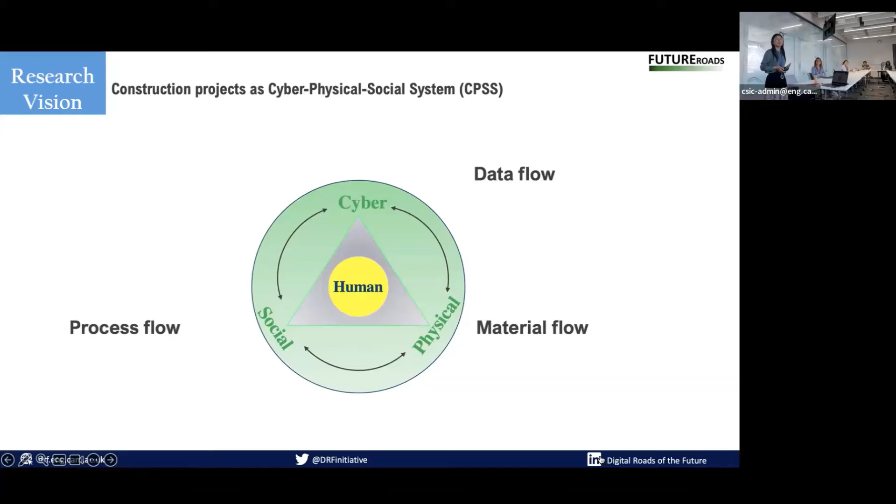I always try to answer the research question of how to adapt the data, process and material flows in CPSS construction projects to modern construction methods and digital transformations. Because the construction industry is quite a traditional industry, which is very reluctant to change. It has its own data, process and material flows, and modern construction methods and digital transformation have introduced new flows, which we have not very well fused or integrated. So that makes things more complex, and it causes a lot of chaos, as I can see.

So I try to look at this problem in my whole research, and I have looked at the data flow by integrating IoT, BIM, and blockchain, using this digital technology to bridge the data flow between the cyber, physical, and social subsystems, and to achieve data-driven decision-making and cognitive intelligence by streamlining the data flows among the different subsystems.

And also, I looked at the process flow of construction digital transformation, how digital technologies shift the process flow of construction project organizations. And I looked a little bit at the material flow by looking at the waste materials, and now at carbon, because carbon is also associated with the material flow. So that's what my whole research landscape looks like.

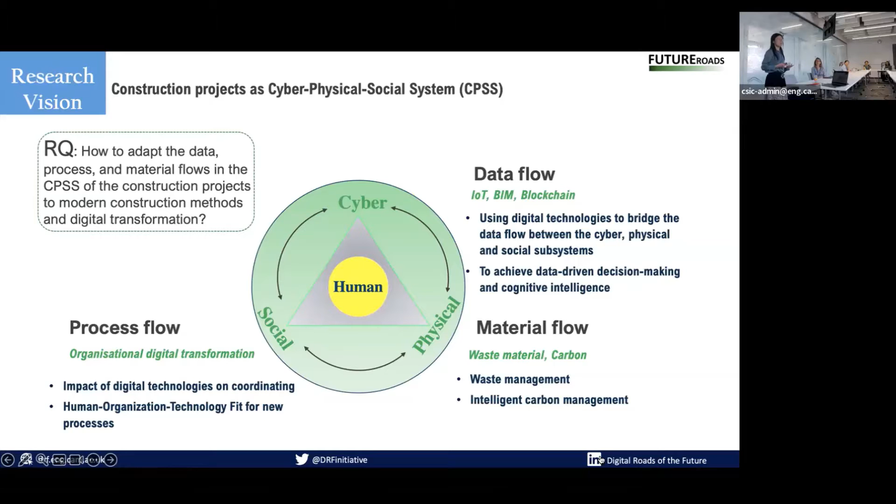And I think humans play a significant role in this system. How do we adopt technologies while considering humans' requirements and learning curves, and how to ease the work and make the system more friendly and digitalized or automated for the ease of humans, to assist humans, to augment humans. That's something I would like to achieve in my future research.

So enough about me. This is the outline of my talk today. I'm aware that maybe the audience is not all in carbon-related areas or highways, so I will start from a general introduction of the infrastructure sector, its impact on net zero and the carbon management standards at a higher level, and then dive a little bit into the highway industry, the practice that I learned from the engagement with National Highways and its network, and identify the gaps and the need for trust.

Then I'll present the concept we proposed called carbon data trustworthiness, what the conceptual framework or model looks like, and what we try to achieve later. And the research and industry engagement plan will conclude this talk.

So I think everybody knows that there's an urgent schedule for us to achieve net zero by 2050, and by 2030, that's the middle of it, we have a very huge emission gap. We need to reduce 12 to 33 gigatons of CO2 equivalent, which means we need to use 100 to 200 gigatons less of reinforced concrete.

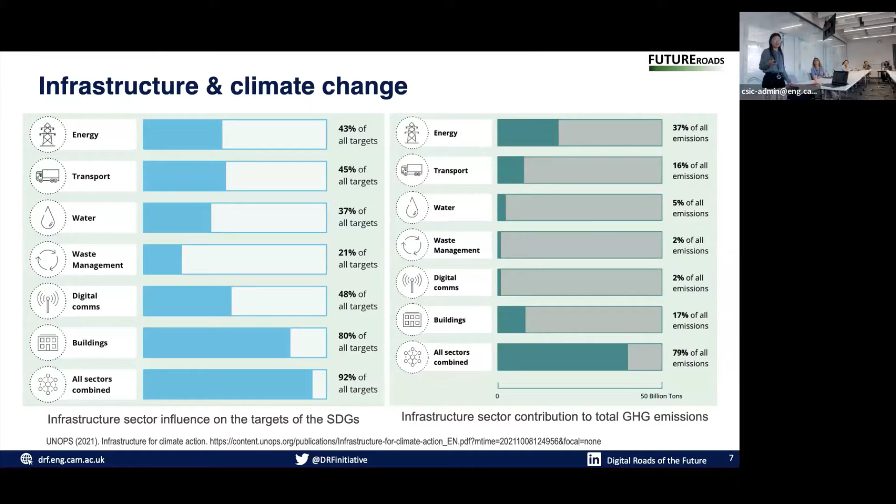Infrastructure plays a significant role in climate change and influences the sustainable development goals. You can see that all these infrastructure sectors combined influence 92% of all the targets of the SDGs, and infrastructure contributes 79% of total GHG emissions, which is a lot. So we need to act now, and join our forces.

There are lots of carbon management standards and guidelines being developed. The most widely used one is the Greenhouse Gas Protocol. They have a set of protocols for countries, cities and communities, as well as companies and organizations. These are all more overall, high-level greenhouse gas, CO2 management standards.

We also have a lot of international standards listed here, and also national standards like the BS ones, PAS 2050 or the 2018 ones. These standards are more focused on life cycle assessment, LCA, and environmental product declarations, EPD. They are about principles, frameworks, requirements and guidelines, and some are methodologies for the overall environmental or sustainability assessment of general products or construction works.

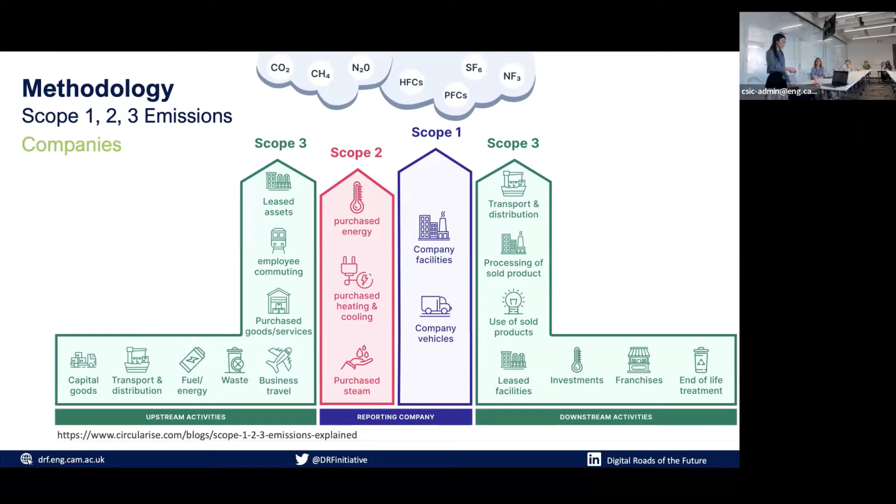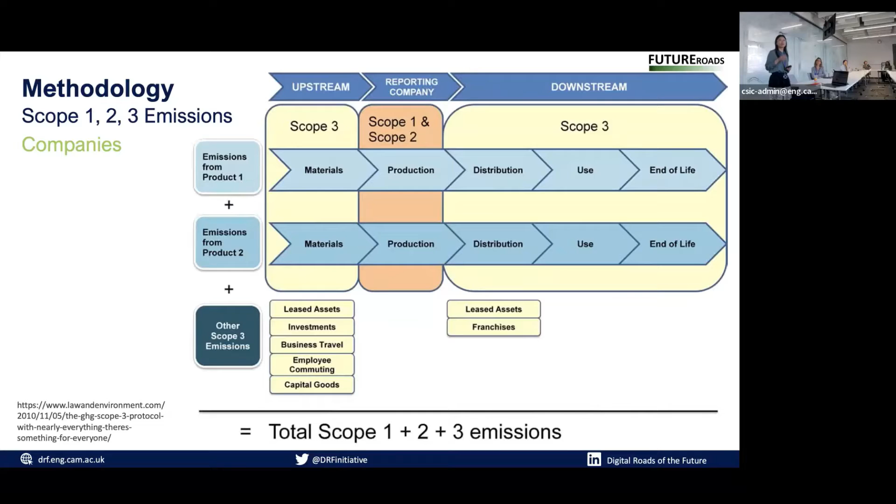And this is another way to look at the 3 scopes. If a company has different products, you can see how the 3 different scopes stem from the life cycle of their products, and adding them up, we have the total emission of one company. There's also another methodology for accounting carbon, which is the life cycle carbon modules of projects and assets. This is more focused on projects and assets. It categorizes carbon into embodied carbon, operational carbon, and user carbon.

These modules are adapted from the BS EN standards and PAS 2080, which I will articulate later. This also links to the EPD, which sometimes calculates just cradle to gate or cradle to grave. A1 is raw material supply, A2 transportation and A3 manufacturing; that's cradle to gate, which means from raw material to products.

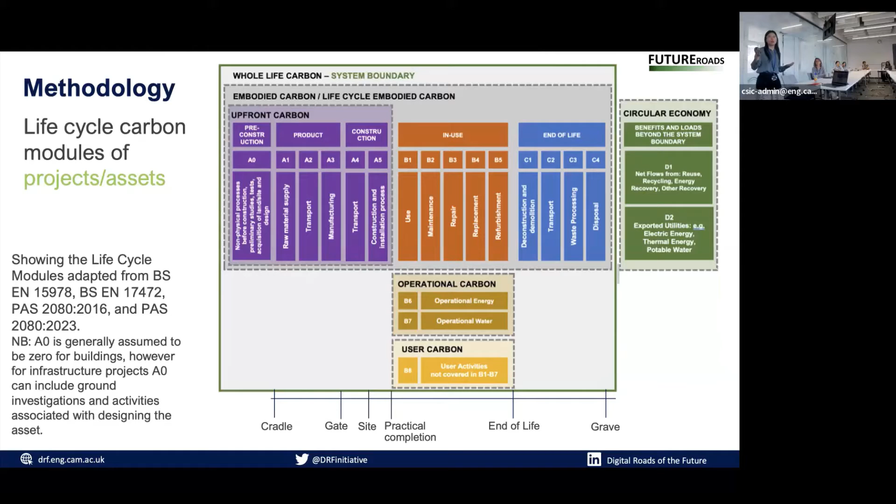For construction industries, that's to the gate of the construction site, and then we have construction activities, the practical completion on site. Then we have the in-use stage, and when it ends, we have the end of life calculation, when everything is disposed, and we enter the grave stage. And another methodology is product carbon footprinting.

So this is more focused on the product, the 7 stages of a product's life cycle, from its exploration to the end of life. And this also can be connected to the different scopes of the GHG protocol. And also here, I want to remind you to think about linking the 3 different methodologies, like the 3 different scopes, that's for companies, and then the life cycle modules, the A1 to A5, B1 to B8, C1 to C4 of the life cycle of projects, and also these product ones.

I think these are the different lenses to look at carbon emission and accounting, like different scopes, but they can sometimes be related in a lot of ways. Like in our construction industry, a project is to deliver a product, like a highway or building, that's a product. And organizations are sometimes project-based organizations. So there are interfaces between these different ways or different lenses to look at this. And I think we need to be more clear about and streamline the interfaces among these different methodologies.

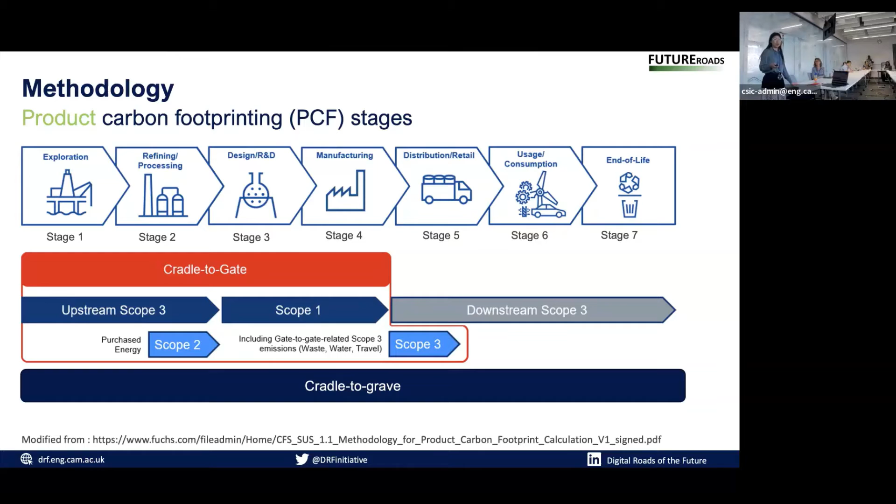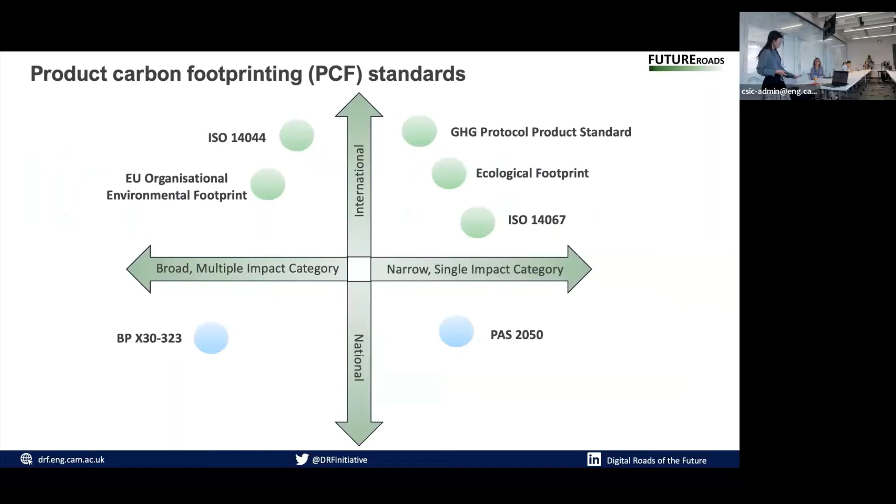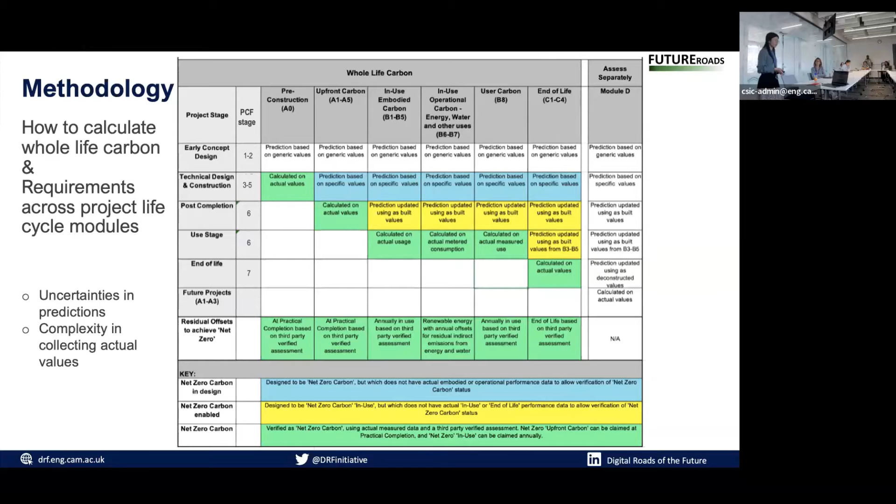What I want to emphasize here is that there is a lot of complexity in collecting the actual values. So on the one hand, there are a lot of uncertainties in the predictions, and on the other hand, there's a lot of technical and managerial complexity in collecting the actual values. So ideally, we can calculate the whole life cycle carbon using all those different methodologies, but in reality, it's very hard to get reliable data to support our decision making. And what I've introduced before, all the standards are more general.

And now I'm going to narrow down to the standard for carbon management in infrastructure. You must have heard about PAS 2080, which is widely used in the UK industry. We have an updated version of this this year, so it includes buildings already. And this one, the guidance document for PAS 2080, if you are looking into the carbon management area, I think is more detailed or specific about how to do it. And these are just some key terms to help you understand the differences we're talking about.

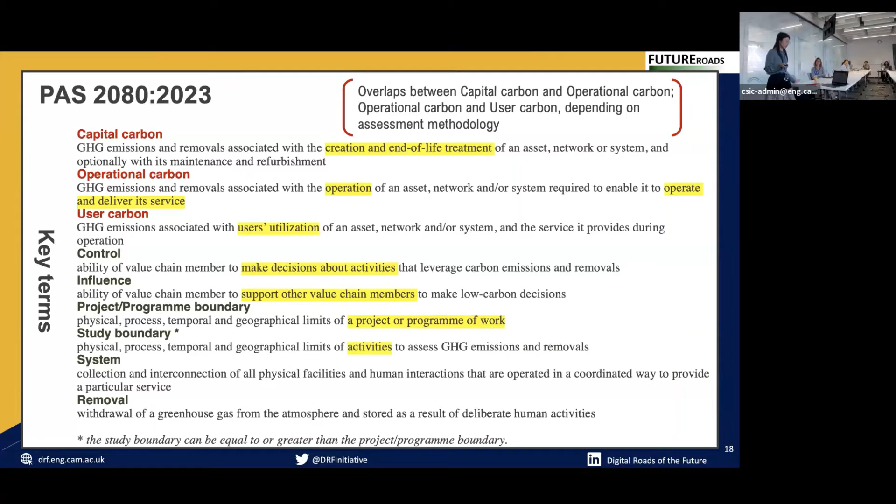Capital carbon, which is also sometimes called embodied carbon, means the creation and end-of-life treatment of an asset. Operational carbon is the operation of an asset, and user carbon is the users' utilization carbon. But we can see that in capital carbon, sometimes we also calculate maintenance, refurbishment and operation, to enable the operation and delivery of services for utilization. So there are some overlaps between these three categories of carbon in infrastructure. Where the scope lies depends on the methodology you're using, and some other terms are not very significant to this talk, but if you look into carbon calculation, you should be aware of those.

And so the new PAS 2080 is expanded in scope to include not just infrastructure, but also buildings. It's focused on behaviors and good practice principles intended for the whole industry. And it looks not just at assets, but also systems, networks, and sometimes the whole system of systems. It emphasizes the importance of leadership, governance, and collaboration across the value chain and beyond, and also includes guidance for government, regulators and financial risk. It encourages a consistent approach across the built environment industry, but it does not provide this consistent methodology; it just encourages companies and organizations to create this. And it emphasizes that we should not conflict with other existing standards, schemes and notices.

So I want to highlight these consistent approaches, because the standard developers may also realize that there are currently no consistent approaches. That's what we're trying to do here. And more about what it is not about. It's more about the process of carbon management across the value chain network, but it's not about prescribed quantification or assessment methodologies and data gathering. A lot of companies are referring to this, but they cannot find the quantification or assessment methodologies here, because they said this is already addressed in other standards and specifications, referring to some of the standards I summarized before, including ISO 14044 and the other ones.

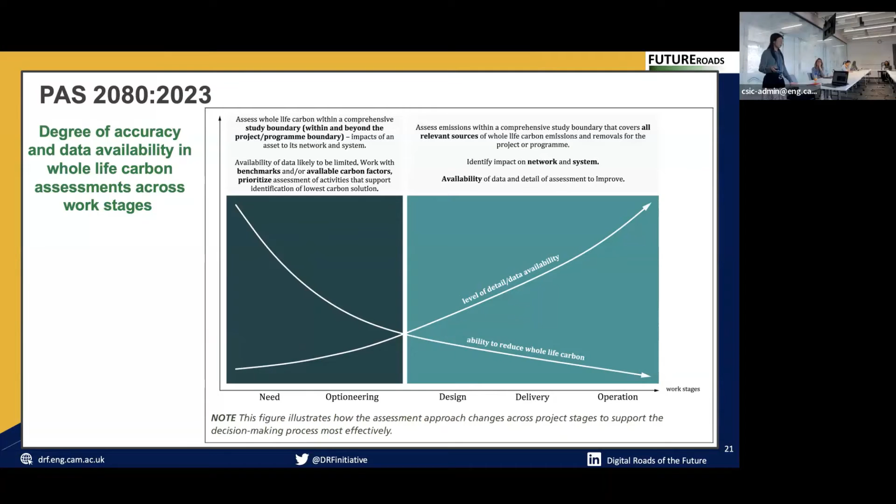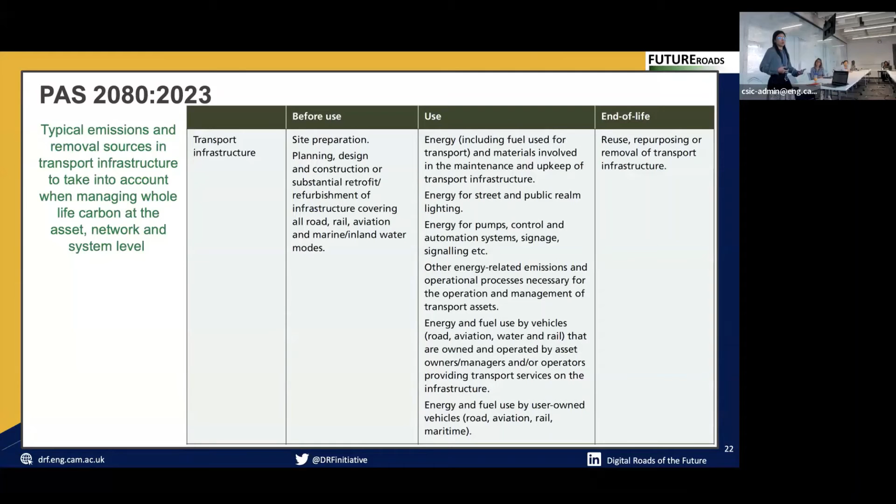And these are some of the typical emissions that were listed in PAS 2080 related to transport infrastructure. So what you can see is just some points, which are very broad and general. So I didn't see that stakeholders can refer to this to streamline the carbon calculation methodologies, or what they should do or not.

So now, since my project is focused on the highway industry, I will introduce more about this. National Highways have their net zero plan. They would like to achieve zero corporate emissions by 2030, net zero by 2040 in maintenance and construction, and the road user emission net zero goal by 2050. And these are the kind of activities they are doing to push through this.

It's just for background. They also have some different strategies and plans, like this carbon construction innovation program, which aims to identify and define the challenges and opportunities for innovations. And the carbon management system, which I've heard them talking about and is still in development. I think it's an overall management framework or system they want to oversee the carbon management.

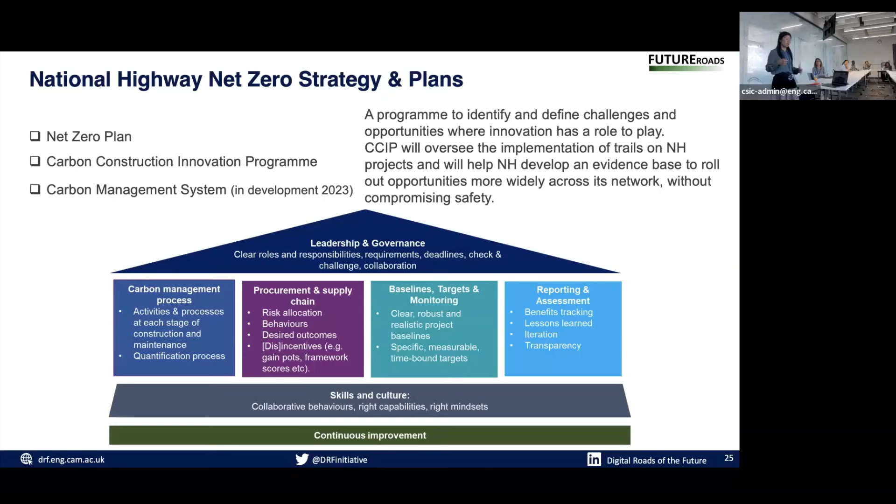So they need to input an item and select its type, type in the quantity, and also look at the carbon factor, and then the tool can calculate the carbon emission of one single item and the total carbon emission. That's how it works.

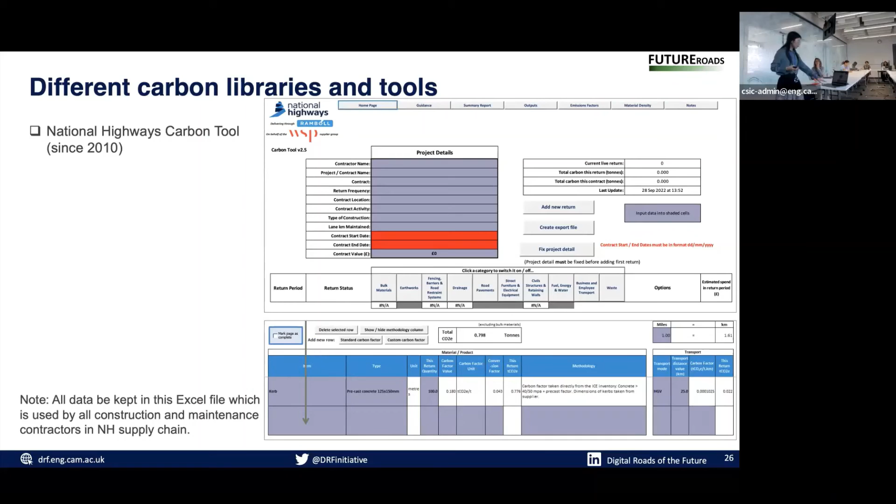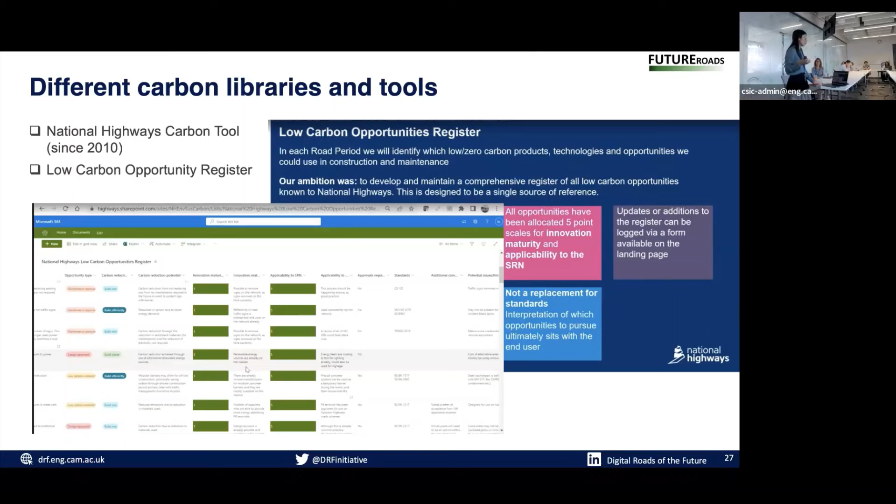And they also developed something called the low carbon opportunity register, in which they have identified 115 low carbon opportunities, like maybe a low carbon material; one item is one opportunity they have identified. It clearly records the opportunity type, the carbon reduction in what category and to what extent, and the applicability to other projects, all on SharePoint online. I don't think it's publicly available.

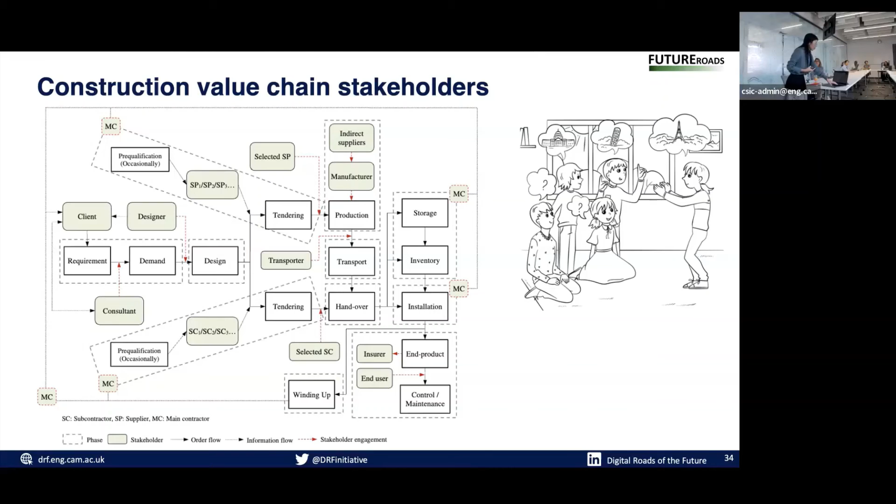Okay, so here comes the gap I will need to look at now. We all know that in construction we have a very prolonged value chain with many stakeholders. So if you have played the telephone game, or what they call Chinese whispers, you know that when the value chain gets longer, you tend to get the wrong information. That's why sometimes the back end turns out to be the wrong information.

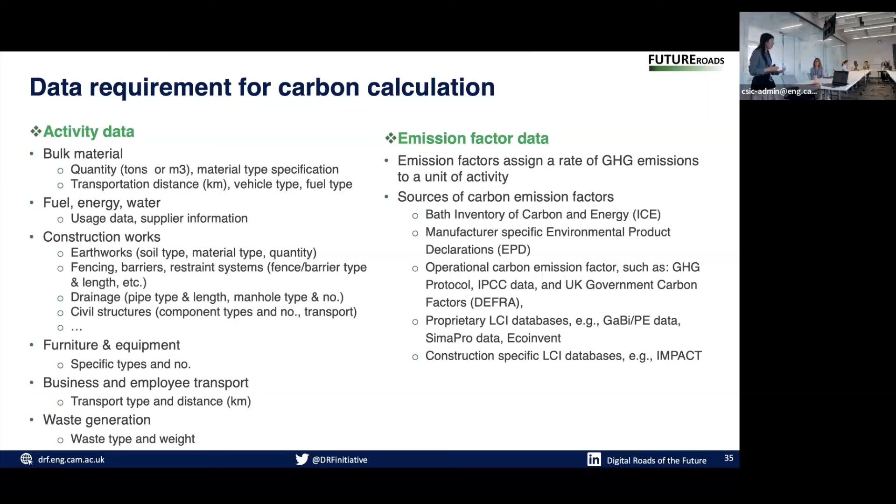And bear in mind that there is so much data required for carbon calculation, including the activity data and the emission factor data. There are so many different activities that we need to consider, and we have different choices of emission factors. So with so much data required, and with such a prolonged value chain, it's hard not to get the information wrong.

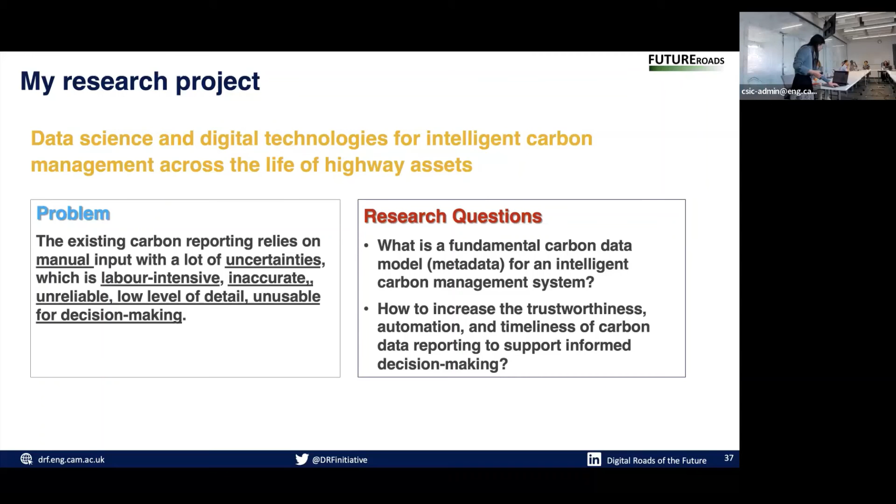What we try to do is to develop a fundamental carbon data model. We could make it available for an intelligent carbon management system, and to increase the trustworthiness of carbon data reporting. And this example carbon data flow we identified, which you can also refer to the stages that another table has shown.

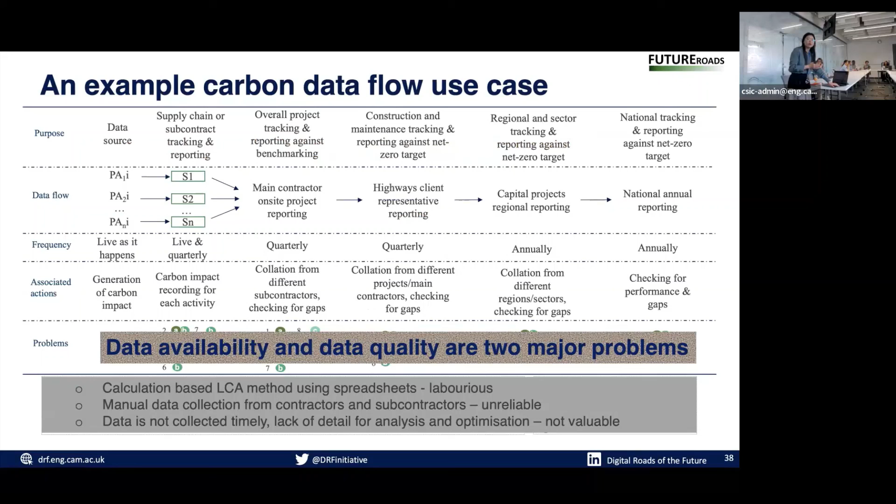So what I want to emphasize is that data availability and quality are the two major problems that we identified through the interviews and the industry engagements. And the current methods to do this are laborious, unreliable, and not valuable for decision making. So we proposed this concept of carbon data trustworthiness, which identified data availability, quality, compatibility, and security as the four key pillars to achieve it.

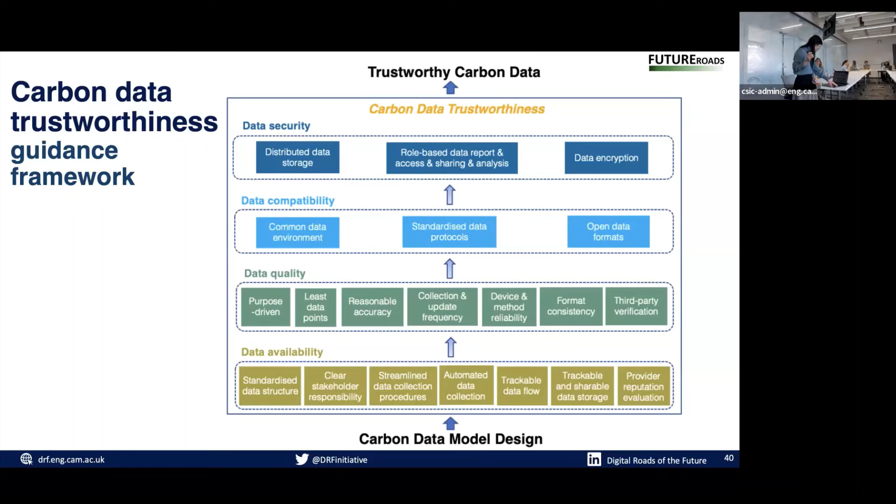And then we identified the key principles and the technologies to achieve this, including, if we want wider availability of data, we need to have a standardized data structure, clear stakeholder responsibility, and streamlined data collection procedures. And all these different technologies and principles are a bit high level. We propose this digital carbon management system framework.

We are aware that there is data in different forms, here and there, in forms that might not be designed for carbon accounting or calculation, but they are somewhere there, like the BIM models or the bill of quantities or some of the site logs, or the procurement database, ERP database, and some of the IoT systems. So all this data can directly or indirectly be used to calculate the carbon.

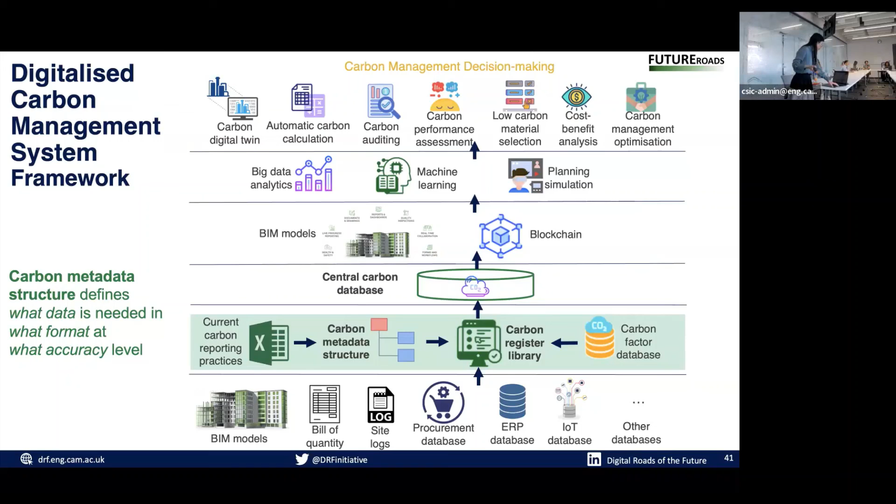We don't want to add extra burden to collect the data or to increase the cost of collecting data. So what we want to do is to help develop this carbon metadata structure so that we can integrate or mine this data from these different sources into a centralized carbon register library, transforming all this data from different sources in different formats into a standardized format. And then after we have the standard data, we can unlock a lot of potential for big data analytics, AI, machine learning, and decision-making applications.

And the ongoing work I'm doing now is to review and sort out the ontologies and categories under the work breakdown structure, to map the key areas, and also compare different libraries. I introduced some of the National Highways libraries, and I also got access to some of Costain's WBS and carbon libraries. So I'm trying to compare them and identify the high-level map to the work breakdown structure, and then identify the metadata required for carbon calculation.

And also I'm doing some interviews to confirm the key challenges in the carbon management system architecture and the carbon data collection procedures, trying to use this metadata structure and our model to streamline these data collections.

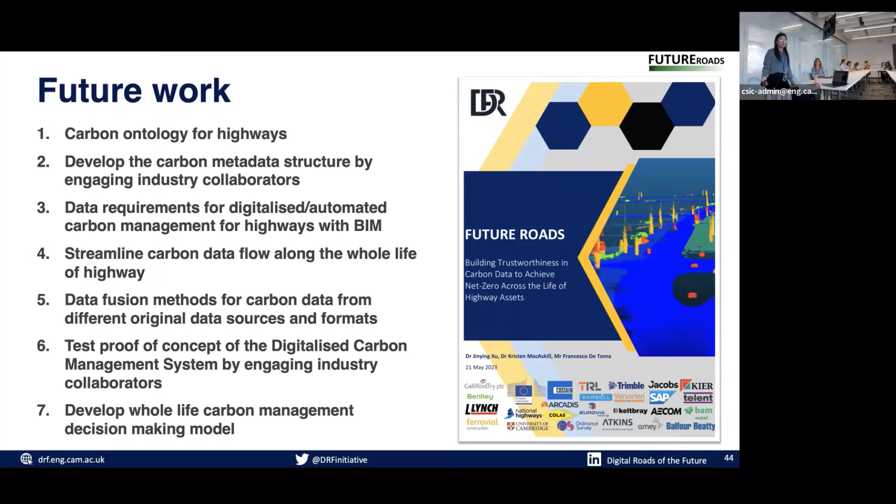And for the future work, we will try to do more of the academic part. We will develop the carbon ontology for highways, develop the carbon metadata structure by engaging industry collaborators, and also study the data requirements for digitalized or automated carbon management for highways with the use of BIM, streamlined carbon data flow along the whole life of a highway, and data fusion methods for carbon data from different sources. And engaging with the industry, we will test the proof of concept of this system, and it's supposed to work.

I was very bad at time management, because I tried to cover a lot of related topics, because it's a really broad thing. So I went through the carbon management standards, including the GHG Protocol and the international and national standards, and the three key methodologies that we are using in different scopes for carbon accounting. And also a little bit about PAS 2080, which is the key guidance standard that we are using for highways, infrastructure and the building sector.

And also I quickly went through some of the National Highways practices, from its structure to the tools they're using and the gaps. And then very quickly ran through the trustworthy carbon data model we're developing, and summarized some of the work we try to do.